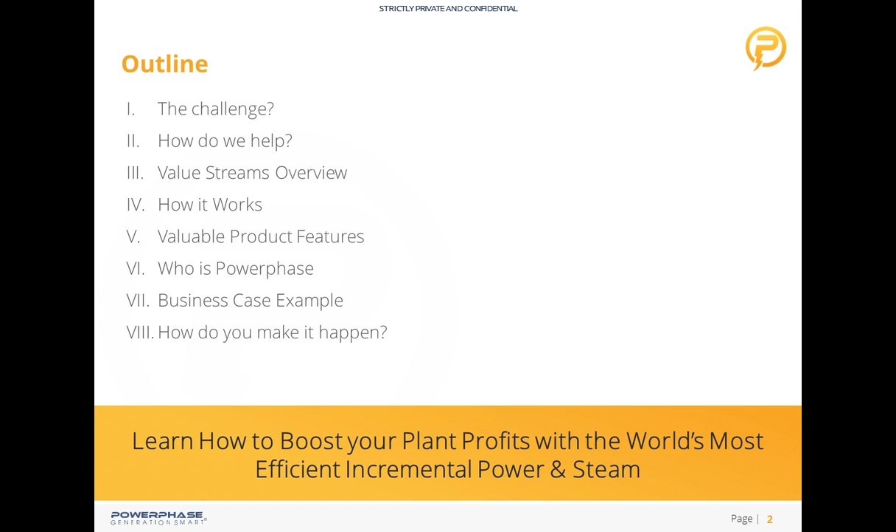So, there's an interesting phenomena happening with natural gas pricing, and it's really driving some market changes. And there's a lot of development going on in many parts of the world now where there's a significant amount more power and steam required either for just power generation, but we're seeing a lot of demand for process-related incremental steam and power. And one of the things that is unique about our system is actually the amount of power that we can deliver and the amount of steam.

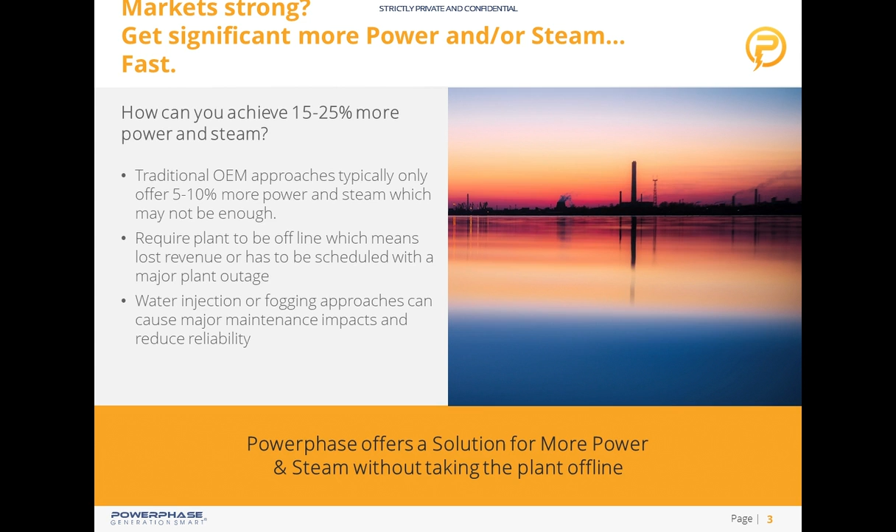So I'm going to show you how we can get 15 to 25% more power and steam. And also, it works in conjunction with the OEM's equipment and any upgrades they provide. So it's not an either or. It can be an and. And so I'm going to also talk about how the revenues are improved with our system.

So how do we help this challenge for this incremental steam and power? I think the biggest differentiator of our product, and I'll go into this a little bit, is that we really don't require a plant shutdown to do this. We've installed this in a few different places, and basically we've integrated with typical borescopes and so on that would happen at the plant.

And we have several sites out there running our product now, and some of them are running it more or less continuously or have run it continuously for a month or two straight. And we're working with new customers right now where some of the reliability aspects of the plant, namely their instrument air system for a process plant, for example, is a very critical piece.

Our system, at the end of the day, is a giant air compressor, and in many cases can supply the whole plant's air supply system as a backup from our system. So avoiding maybe costly rentals or potential reliability issues there.

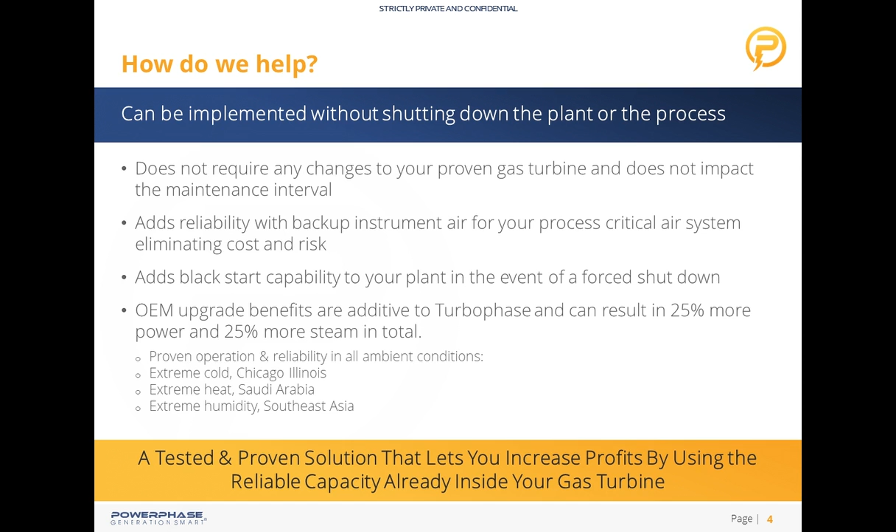And when you're in a process-related plant, the gas turbine is really not the main focus. Really, the process is the focus, and the gas turbine is really a non-product cost. It's just a cost. So depending on how the efficiency of the system is measured, we actually improve the gas turbine efficiency. So we can help in situations there sometimes.

And I'll touch on that a little bit more and give you a primer for what I'm going to present in December at PowerGen. And then, as I mentioned, the black start generator. The black start can be an and, or it can be an or. But in most cases, it's one or the other is really how people would set it up. Deliver the power augmentation or deliver the electricity to the plant or to the grid. It can be dispatched as a reciprocating engine to the grid if the gas turbine's not running.

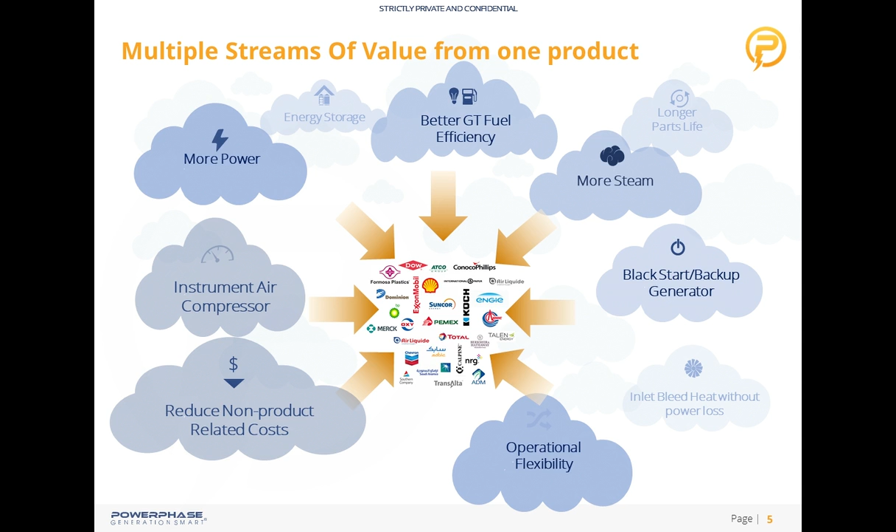And then on the steam side, our system is mostly gas turbine-centric power, but it does produce more steam. And it has an interesting impact on the duct burner process that a lot of these process plants have a heavy amount of. Because of the thermodynamic effect of air injection, we actually increase the capacity on the duct burner side. And I'll get into that a little bit more. And then, as I mentioned, it is a fuel efficiency improvement on the gas turbine itself, and it's more or less neutral in combined cycle.

So this is just a simple schematic of how our system works. Basically, you take fuel in, and it produces about 15 pounds a second. And just to put that in perspective, I ran the numbers one time. It's like 1,000 of the biggest compressors you could buy at a big hardware store, running continuously. And it can deliver air at basically the gas turbine compressor discharge pressure, which ranges from anywhere from a little over 100 psi to as high as 500 psi in some aeroderivative applications.

There's a closed loop cooling system that pulls water through it, cools the engine and the intercooled compression process. And it can either be tied into the plant, or you'll see some photographs here in a minute where we have a dedicated air cooler at ACC-cooled combined cycle plants. And then obviously it generates the hot air, and it can generate about 2.5 megawatts of electrical output and consumes 20 MMBTU of natural gas, the module itself.

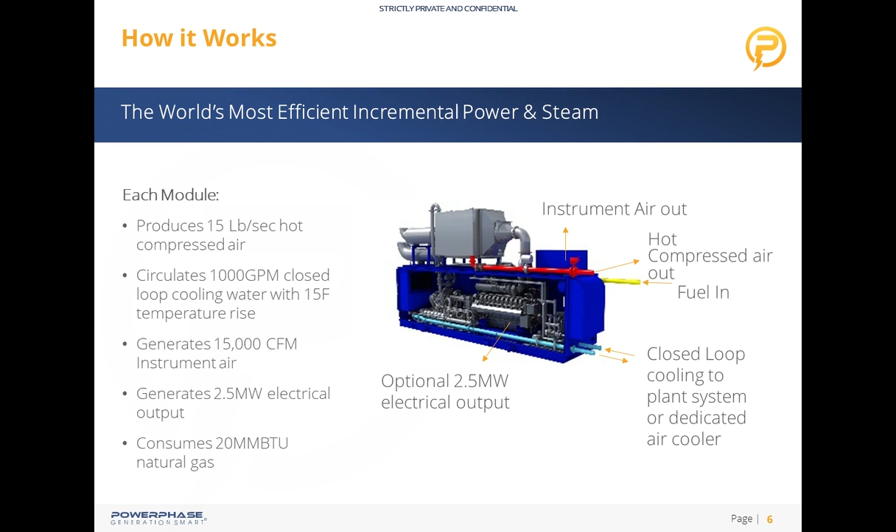So basically, if you look at the output of our system, typically we deliver the air to the compressor discharge plenum at a similar pressure and temperature, and we're utilizing the gas turbine's built-in mechanical, aerothermal and combustion capability, where that gas turbine is typically designed for the coldest day operation, maybe minus 30 F or something like that. Basically, we take advantage of the fact that there's a lot of mechanical capacity left in the gas turbine, and a lot of times on the electrical system as well.

And when we introduce 10% more air, basically we get about 20% more power, 6% more steam, and a 12% increase in the duct burner capacity, because we lower the exhaust temperature between 20 and 40 degrees Fahrenheit. And if you look at that compared to hot gas path upgrades that we see out there, basically there's about a 5% power increase nominally. They are a little more steam-centric, because typically they involve a firing temperature increase, so they're driving the exhaust temperatures up. So they get proportionally more steam, and that's why they typically come with an efficiency improvement. And because of that, you could actually be reducing the duct burner capacity of your system.

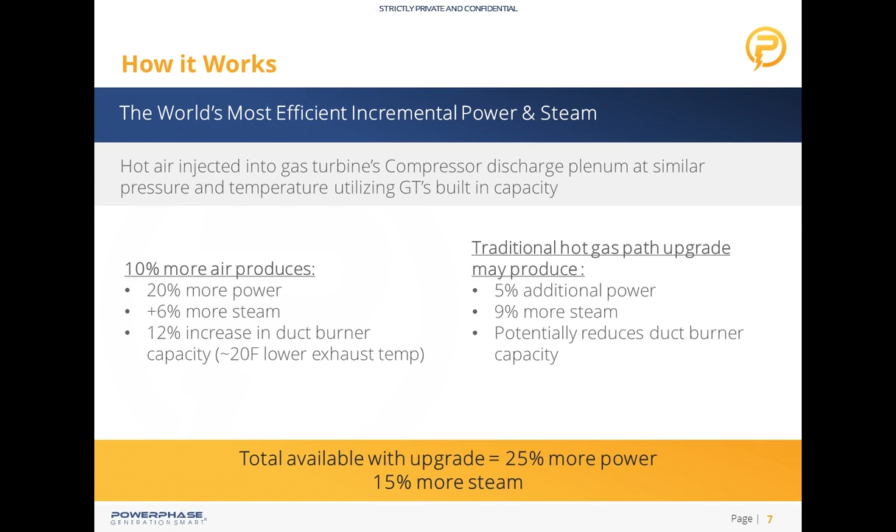But if you put our system in with an upgrade, you'd have 25% more power and 15% more steam. So that's a pretty sizable amount of power, and in a lot of cases we've seen customers looking for somewhere in that neighborhood for increasing their product line on a process plant, and we're able to fit in there nicely and do that for them.

And the other thing, if you look at just the power density, we really are a small footprint, and a unique selling aspect of our system also is when you turn it off and you shut the air valve off, there really is no impact to the plant. So our incremental power and incremental heat rate is really easy to see anytime you turn it on or turn it off. And the other unique thing about our system, and this goes a little bit to why we invented it in the first place, was its ability to be quick starting.

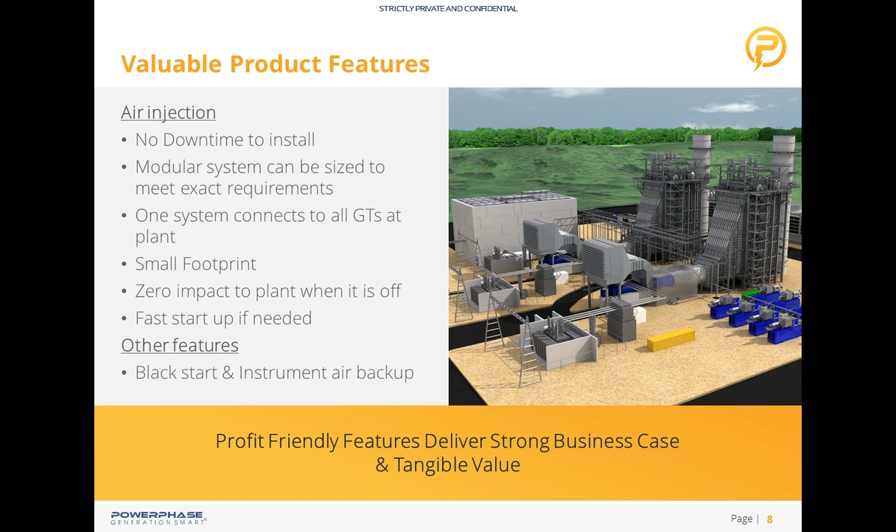So I'm going to go through a few business cases that we ran, and if you want to see the details to these business cases, they are in the backup to this presentation. I'm not going to go through them in detail, but you can see the assumptions that we used here if you download the presentation.

And the first one is a cogen operation, and it's an 8-module installation, basically a continuous process application, on a 4-gas turbine operation. And basically, the way this plant runs is they never run all the gas turbines at full load. They always have one at some minimum load.

And when you do that and you look at the heat rate, we can actually deliver the power that the last gas turbine's delivering with our system, and basically mitigate the poor heat rate that you're getting with that minimum load gas turbine. And this really is a precursor to the utility grid efficiency improvement that we offer.

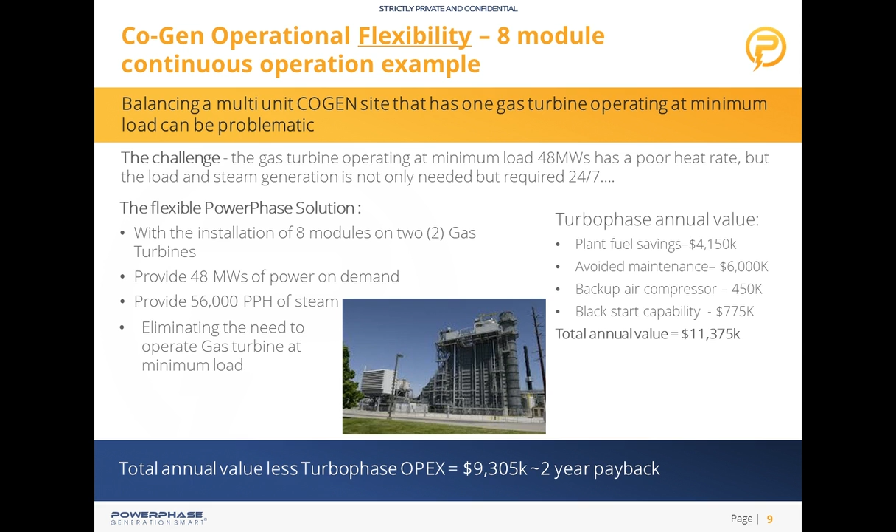And if you look at the cost of our system and the operational expenses, the fuel and maintenance of our system, it comes out to $9 million a year annual value and less than a 2-year payback.

The next business case was another industrial application with a single gas turbine in the MISO market on the Gulf Coast. And there you see an image of our module with the air cooler above it. It's a single module with the air cooler. The yellow piping in the front is our gas skid.

And similarly, here there's the way the customer values the steam production that we provide, and the internal pricing. It's $780,000 of steam value, and by self-generating power versus buying it off the open market, just looking at their annual pricing on average, there's about a $600,000 saving there.

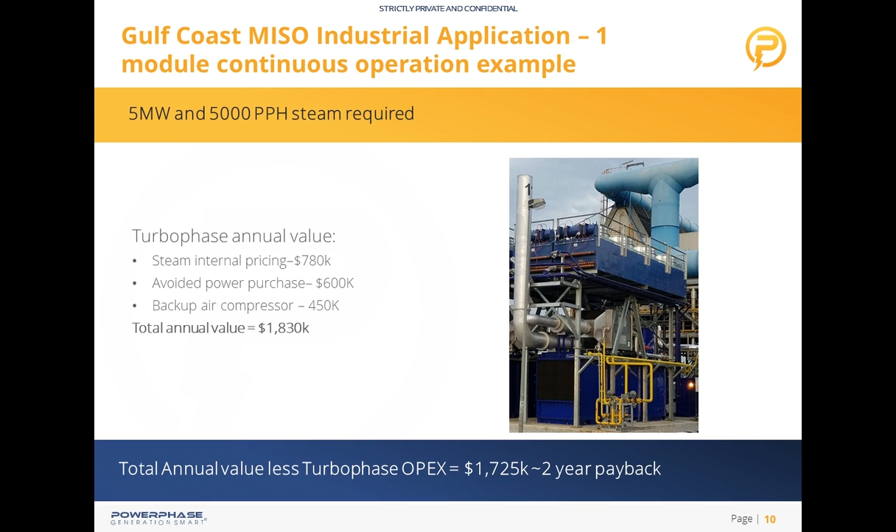And then also this plant had some air compressor rentals. So again, if you look at the value that we provide, it's about $1.8 million a year of value. It's a single module. And if you look at the operational expenses of our system, again, it's about a 2-year payback.

And then the last business case: first picture, upper left-hand corner, is Mexico Beach on October 11th.

And I actually happened to be at a wedding in Tallahassee. And I wasn't able to even drive over there because of the convoys of help that were coming from basically all directions.

But I know what I was thinking about on October 10th. I was thanking God it didn't hit where I live. But there's a lot of process applications along the Gulf Coast there that I'm sure are watching that storm very closely. And we have one customer in particular over there that we're planning on putting our system in next year that basically has a mandate to have black start there.

And it was actually a result of last year's hurricane that hit them. I forget the name of it. But they were out of power for 7 days. While the grid was still coming back up, they had 7 days where they weren't able to run their process. We don't know the exact value of that ourselves, but it's in the tens of millions of dollars of revenue and profits lost. And so the ancillary benefit of black start to them is a priority, and they also need more power and more steam.

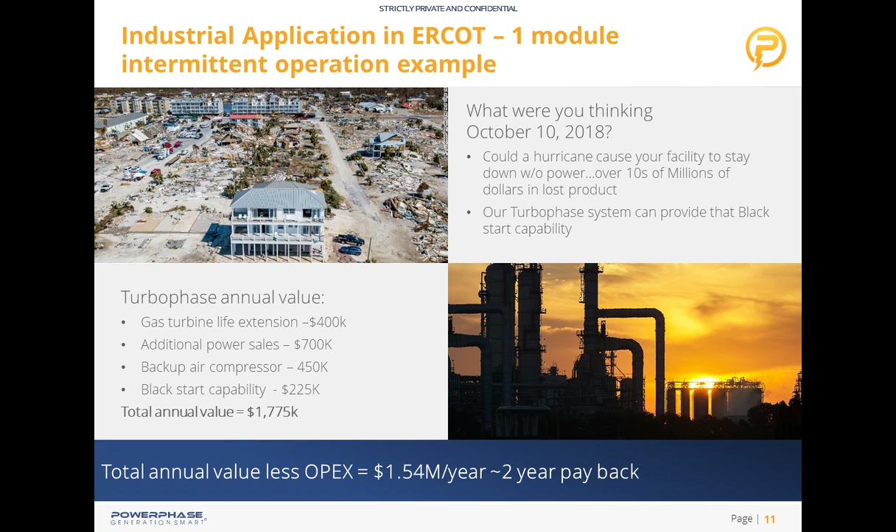So in this particular application, they're going to run it intermittently and play the market with the power sales in ERCOT, but they also value, because they're a process plant, the instrument air backup, and again, like I mentioned, the black start. So similar to the last business case, it was about a $1.7 million annual value stream to these guys, and when you reduce that by the OPEX, it's about $1.5 million a year, and again, about a 2-year payback for our system in that application.

We're basically a 2 to 3 year payback in most utility environments, where we put 10% more power across the whole fleet of combined cycle plants. And when we do that, for every 10 combined cycle gas turbines, they shut one off, while providing the same reserve, which they do by having these gas turbines running at part load. We provide that same reserve by having our system on top of a running power plant.